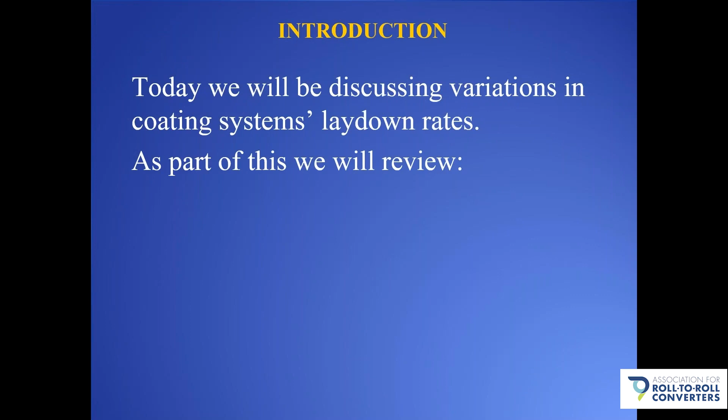So today we'll discuss variations in coating systems laydown rates. As part of this, we'll review the possible causes for these variations and what actions can be taken to address them.

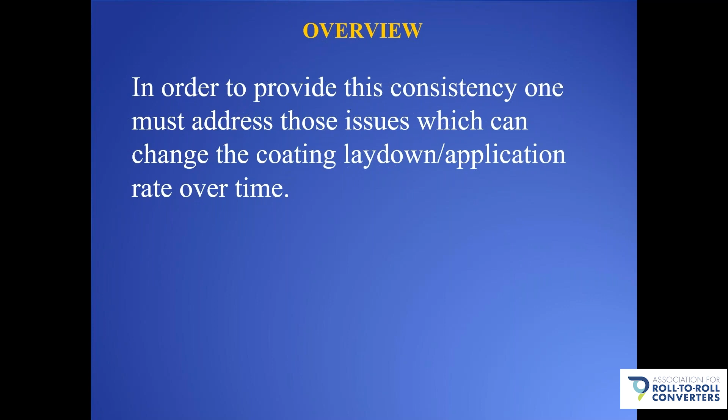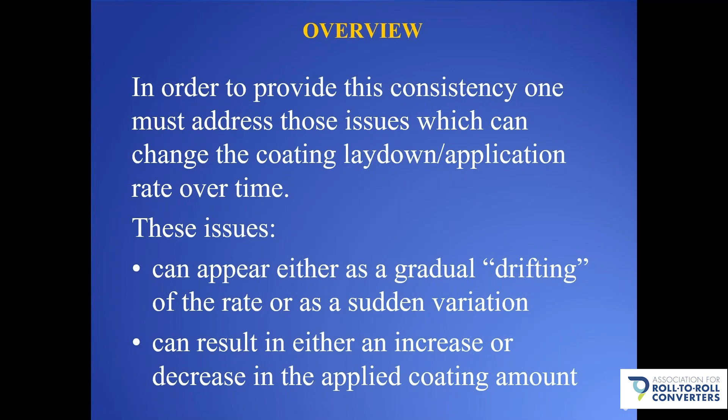So the goal of every coating operation is to maintain a consistent laydown rate throughout a run, as well as when applying the same coating at a future date. In order to provide this consistency, one must address those issues which can change a coating laydown or application rate over time. Now, these issues can appear either as a gradual drifting of the rate or as a sudden variation, and can result in either an increase or decrease in the applied coating amount.

A wide variety of issues can cause these changes to occur. Many are specific to certain types of coatings and coaters, and some are what we'll call short-term, meaning they result in changes in the coating laid down within a single run, and some of them are long-term, occurring over extended usage or between product changes.

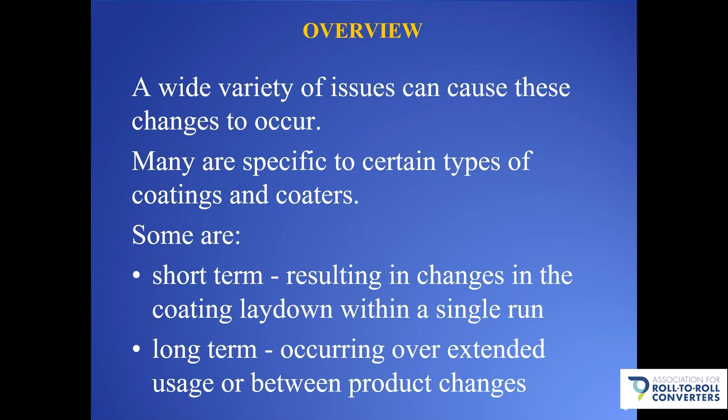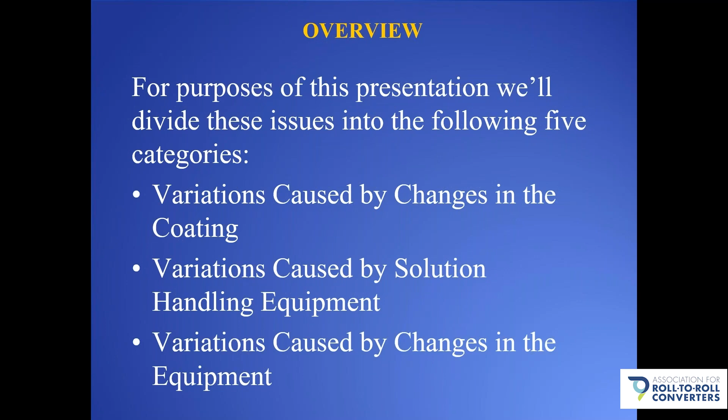So for purposes of this presentation, we'll divide these issues into the following 5 categories: variations caused by changes in the coating, variations caused by solution handling equipment, variations caused by changes in the equipment, and by equipment we mean the coater itself, variations caused by temperature changes, and lastly, variations caused by equipment usage and wear. I'll point out that some of the topics or examples we'll talk about today may fit into more than one of these categories, but for the purposes of this presentation, we put it into a particular category.

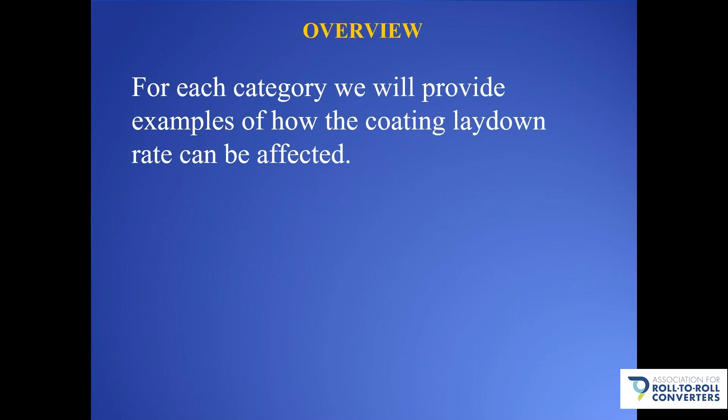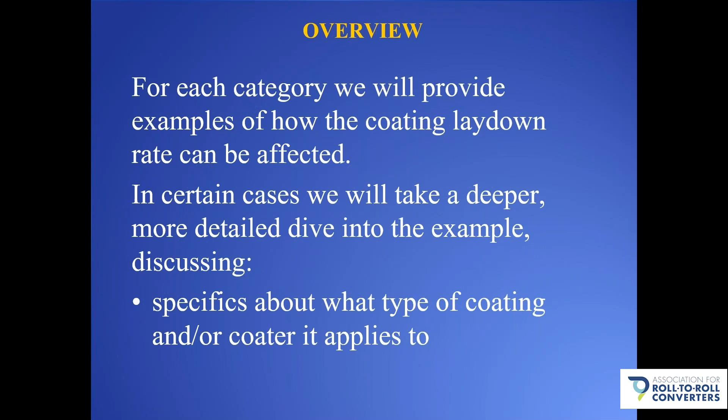So for each category, we'll provide examples of how the coating laydown rate can be affected. In certain cases, we'll take a deeper, more detailed dive into the example, and we'll discuss things such as specifics about what type of coating or coater it applies to, how it can affect the coating consistency, and what corrective actions can be taken.

So let's start with variations caused by changes in the coating. There's several changes that can occur in the properties of the coating that have an impact on the laydown rate, and these changes typically show themselves over the course of a run. So as we mentioned earlier, they typically tend to be short-term issues. They can occur in either water or solvent-based coatings, and they can be found in a wide variety of coaters.

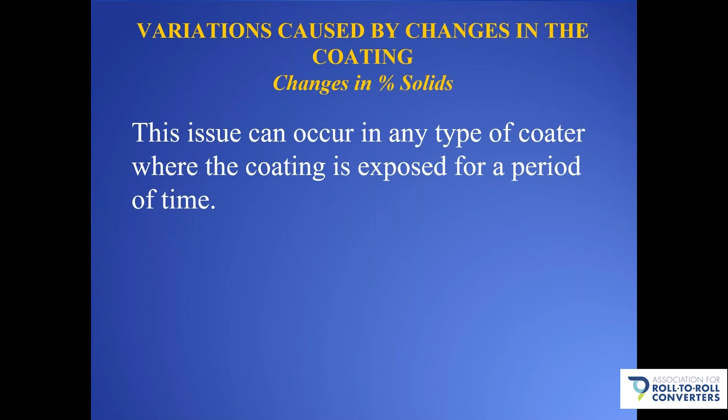So let's talk about a few examples of these issues, starting with changes in the percent solids. This issue can occur in any type of coater where the coating is exposed for a period of time. A typical example of this is a pan-fed offset gravure coater, like you see here, when using a solvent-based coating. So as the coating sits in the pan, the amount of solvent, many of which evaporate under room conditions, continuously reduces. This results in a continuous increase in the percent solids, which results in a continuous increase in the final coating laydown rate.

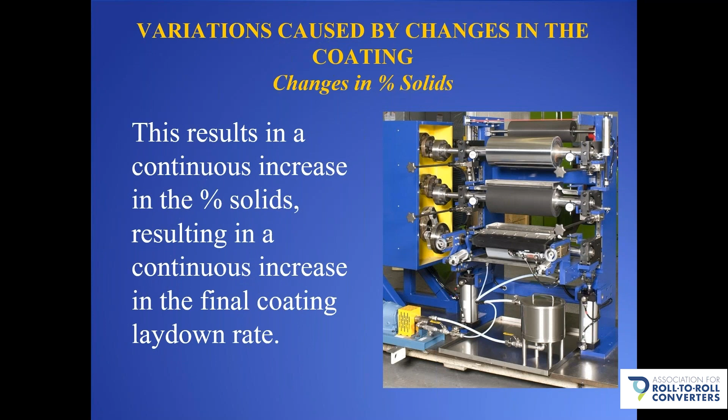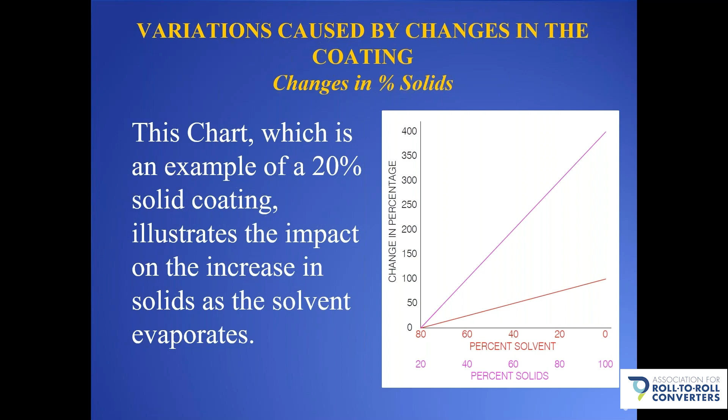So the chart on the right is an example of a 20% solid coating, and it illustrates the impact of the increase in solids as the solvent evaporates. As you see from the magenta line, that shows the change in percent solids as it goes from 20 to 100%, and you'll notice that the change in percent of solids grows rapidly.

Now, what can we do to address this issue? Well, a couple of things. First of all, the easiest way is to reduce the amount of coating that's held in the pan or pond, giving it less time to be exposed and therefore less time for solvent evaporation. Cover the pan or pond to reduce the evaporation or flashing. Or monitor the percent solvents and automatically adjust to correct for it. There's systems that you can use that automatically do this, sample the solvent, and then continuously replenish it.

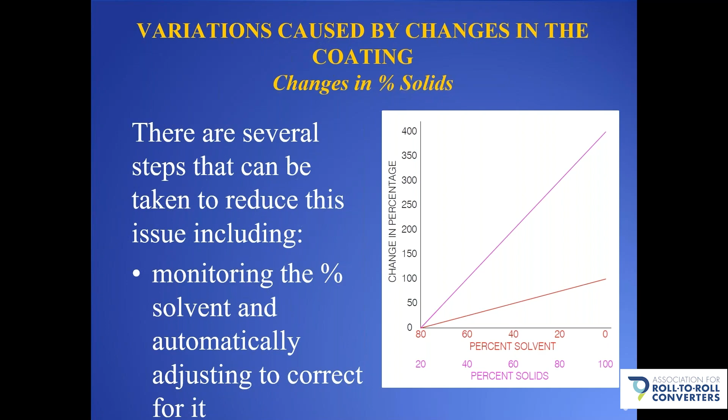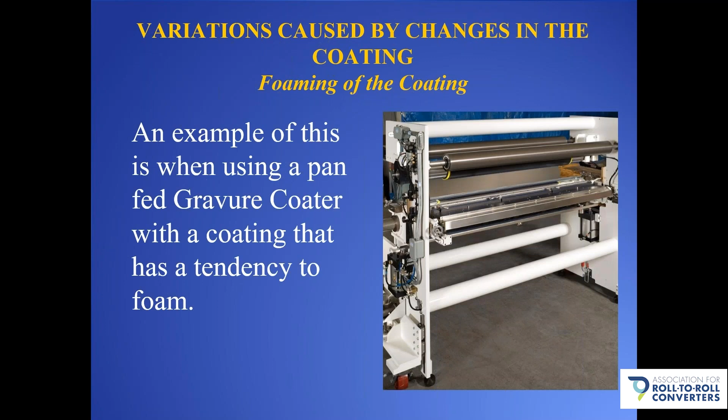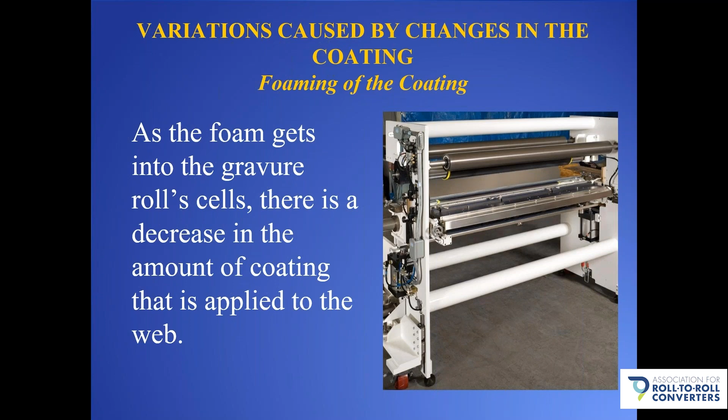So next, let's talk about foaming of the coating. An example of this is when using a pan-fed gravure coater where the coating has a tendency to foam. As the coating sits in the pan, the turning roll causes this foam to form. And as this foam forms, it gets into the gravure roll cells, which results in a decrease in the amount of coating which is applied to the web. Over time, as the amount of foam continues to increase, more foam gets into the cell, less coating therefore gets into the cells, and the coating laydown continues to decrease.

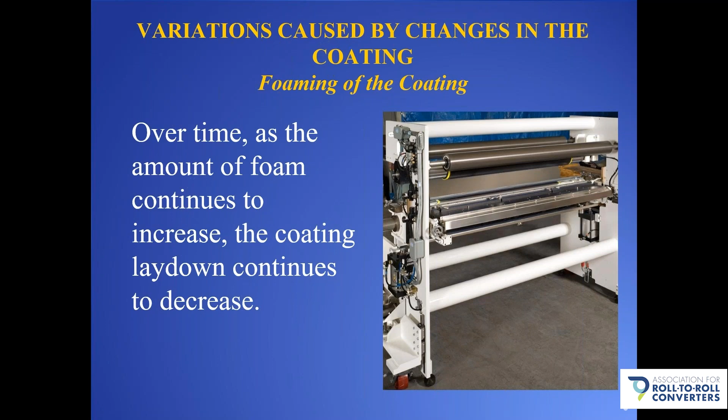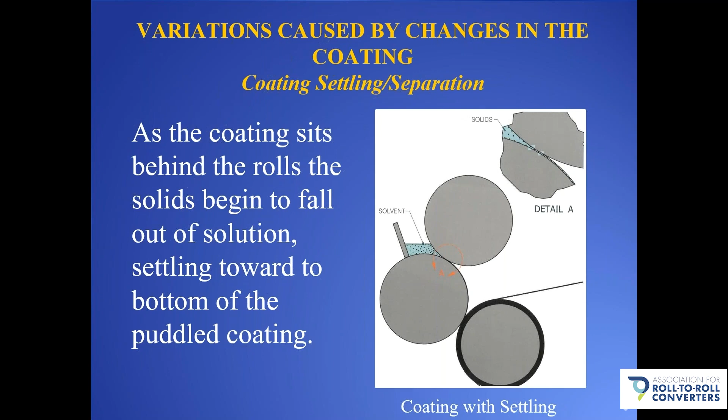Next, let's talk about coating settling and separation. This issue occurs when the solids in the coating begin to settle or separate from the solution that's holding them. As an example, let's look at a nip-fed reverse roll coater. As the coating sits behind the rolls, the solids begin to fall out of solution, settling toward the bottom of the puddled coating. In this sketch, you see at the beginning a fairly even or uniform distribution of the solids, and in time, the solids begin to migrate toward the bottom of the puddle or pond.

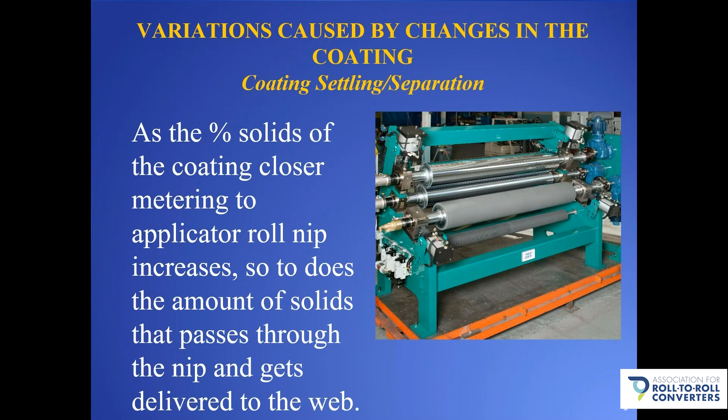So as the percent solids of the coating closer to the metering to applicator roll nip increases, so too does the amount of solids that actually passes through the nip and gets delivered to the web. So how do we address this issue? Well, again, much like we talked about earlier, you can reduce the amount of coating in the puddle, which reduces the time that the coating has to separate. Or you can provide mixing hardware in the puddle, which continuously keeps the solids in solution or in suspension.

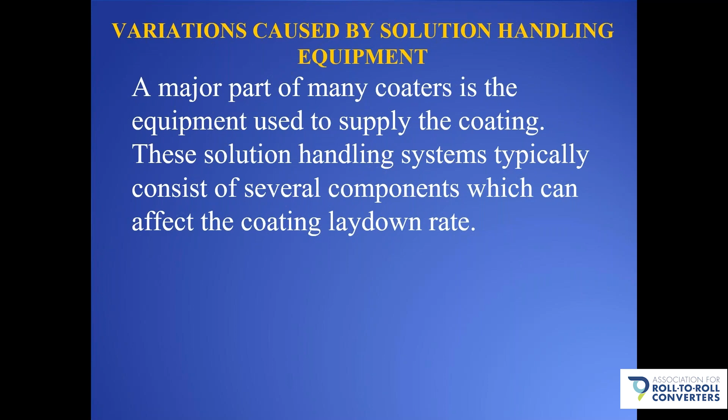So now let's move on to variations caused by solution handling equipment. A major part of many coaters is the equipment used to supply the coating to the coater, and these solution handling systems typically consist of several components which can affect the coating laydown rate. Let's talk about a few examples of this.

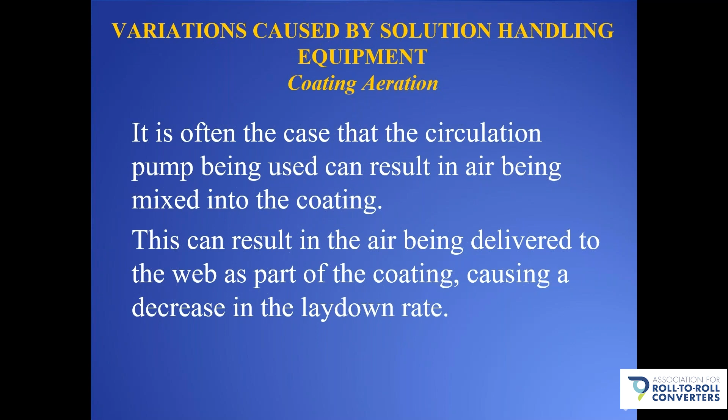Let's start with coating aeration. It's often the case that the circulation pump being used can result in air being mixed into the coating, and this can result in the air being delivered to the web as part of the coating, which would obviously cause a decrease in the laydown rate.

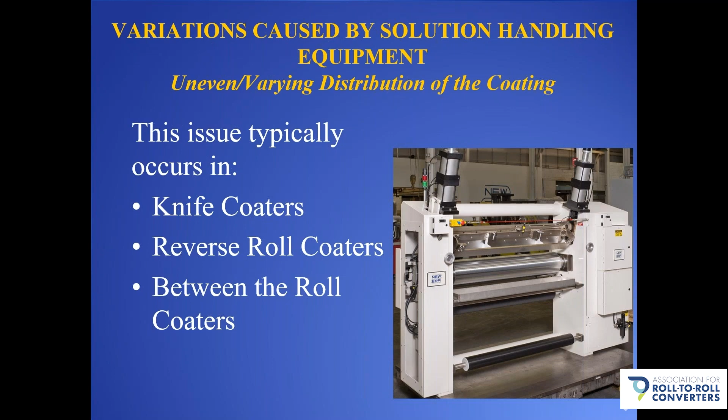Another issue is uneven or varying distribution of the coating. For coaters where a pond or puddle of coating is used to supply the coater, an uneven or varying distribution of the coating to that pond or puddle can result in a variation in the coating laydown rate. This issue typically occurs in coaters such as knife coaters like you see here on the right, reverse roll coaters, and between the roll coaters. Now this issue really shows itself when you get into higher viscosity coatings where the coating itself doesn't have a tendency maybe to flow out and give a uniform distribution within the pond or puddle.

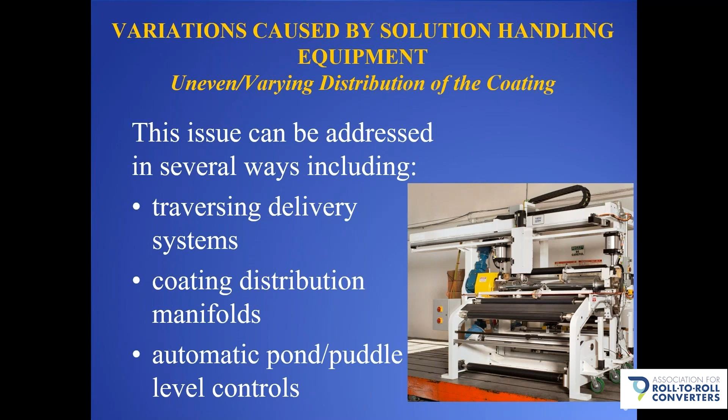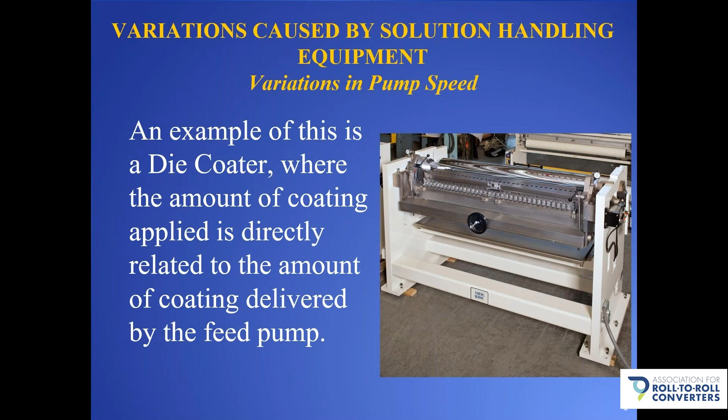So next, let's talk about variations in pump speed. There's several coating systems where the laydown rate is directly affected by variations in the solution handling system's pump speed. An example of this is a die coater like you see here on the right, where the amount of coating applied is directly related to the amount of coating delivered by the feed pump. There's several factors that can cause changes in the pump speed, including changes in the load on the pump due to factors such as changes in your coating viscosity, or drift in the pump motor's speed control.

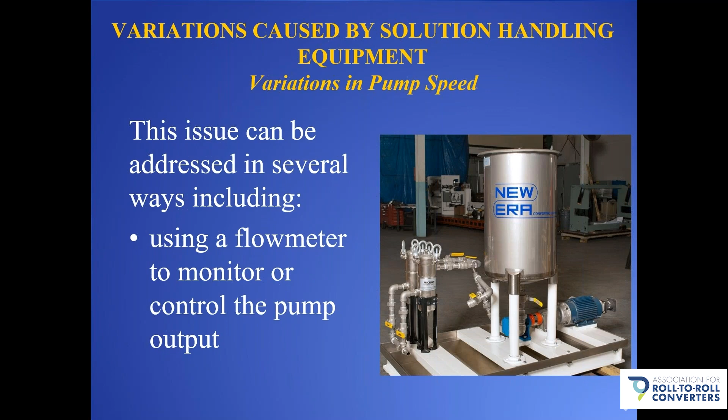So how do we address these issues? Well, we can use a flow meter to monitor or control the pump's output. Or, as you see here, we can use a coating measurement system, a thickness gauge that will measure the coating laydown and automatically adjust the pump speed to compensate for these variations.

Another issue is filter plugging. For certain coating applications, variations in the coating laydown can be a result of the solution delivery system's filters becoming plugged. This can cause a drop in the flow rate to the coater, which will obviously result in a drop in the laydown rate.

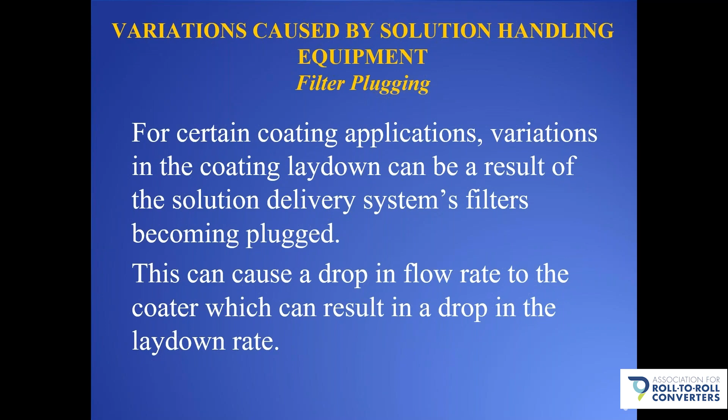So how do we address this issue? Well, we can put a flow meter on the exit side of the filter to monitor the delivery rate and even use that to control the pump. Or we can use differential pressure switches across the filter, where these switches tend to sense the increase in pressure associated with the plugging of the filter and therefore notify you that there is indeed an issue with the filter plugging.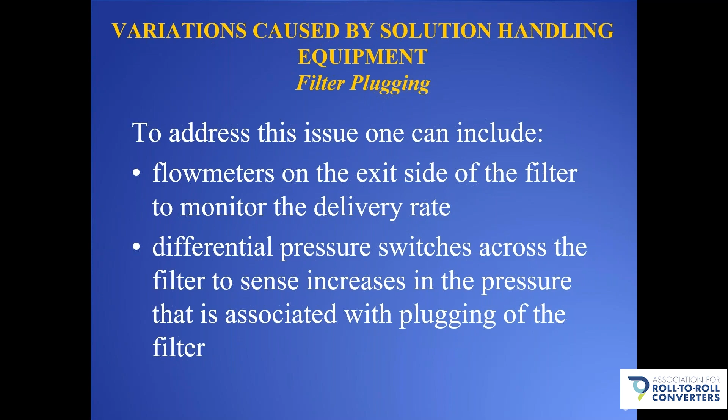Next, let's move on to variations caused by changes in the equipment, meaning the coater itself. It's often the case that issues with the coating equipment can result in variations in the coating application rate. These issues can arise from a wide variety of mechanical and electrical items, can affect virtually every type of coater, and can affect every form of coating. Of particular concern are those items used to adjust and set the coater's operating parameters, where any unwanted variations in these devices during operation typically result in an unwanted change in the laydown rate.

So let's talk about a few examples, starting with changes due to variation in force.

Certain types of coaters can be affected by forces generated by the coating being applied. An example of this is a between the roll coater, like you see here, where the coating can impart a separating force as it passes between the rolls. Any changes in the coating or the coater's operation over the course of the run can result in a change in these forces, and this change in force will lead to a change in the deflection of the rolls, which will result in a change in the laydown rate.

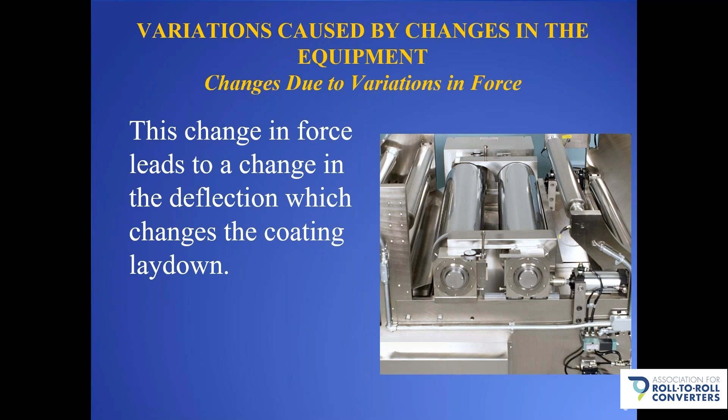So how does one address this issue? Well, first of all, assure that the coating being supplied remains consistent. Assure that the coater's operating parameters remain consistent throughout the run. And lastly, you can get very complicated, and as shown here, use deflection compensation via roll bending that's integrated with an automatic measuring system, which automatically adjusts for any deflection or changes in the roll deflection.

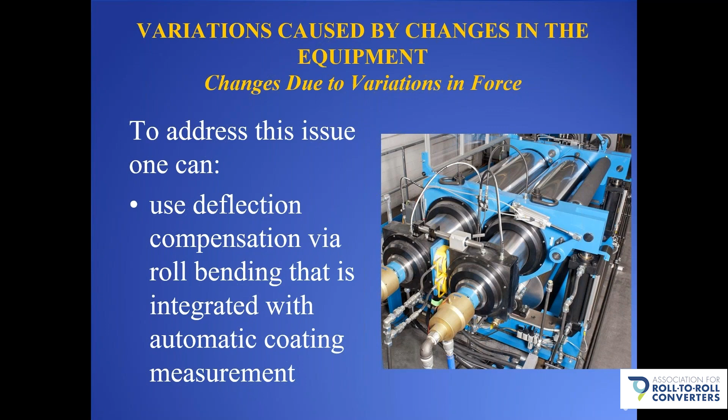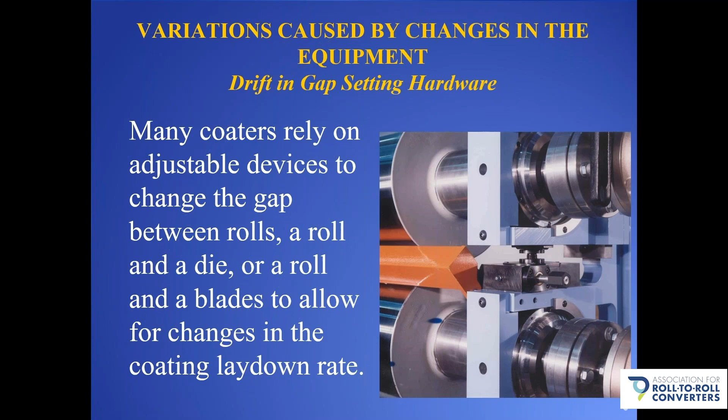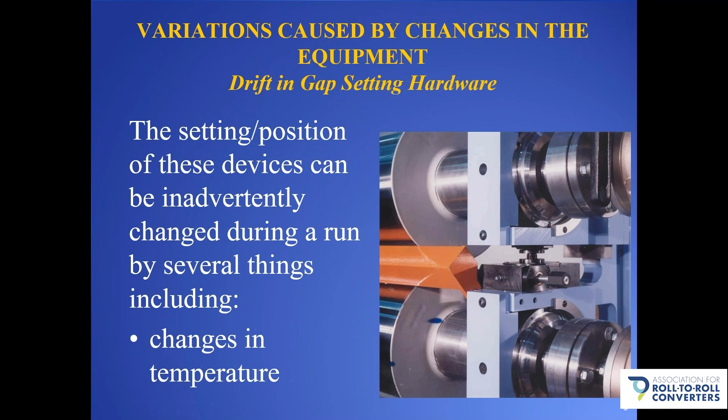Another issue is drift in gap setting hardware. Many coaters rely on adjustable devices to change the gap between rolls, or a roll and a die, or a roll and a blade, to allow for changes in the coating laydown rate. The setting or position of these devices can be inadvertently changed during a run by several things, including vibrations, debris, operator's unintentional contact, or changes in temperature. These occurrences can result in a change in the final coating laydown rate.

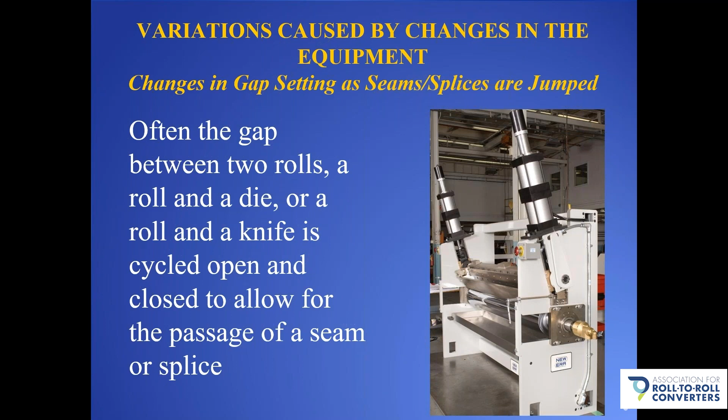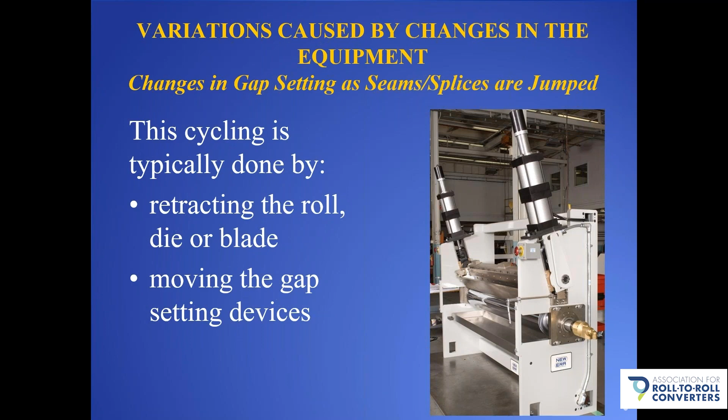Another issue is changes in gap setting as you jump a seam or a splice. Often the gap between two rolls, or a roll and a die, or a roll and a knife, is cycled open and closed to allow for a seam or a splice to pass. This cycling is typically done one of two ways: either by retracting the roll, die, or blade, or by opening the gap setting device and then closing it again after the seam or splice passes. What becomes important is that the design assures the gap is reestablished precisely after the cycling is completed. If it's not reestablished correctly, you're going to have a change in your gap and therefore potentially a change in the coating laydown rate.

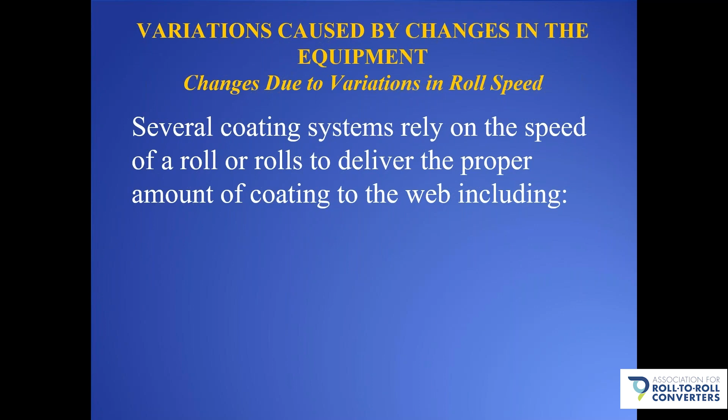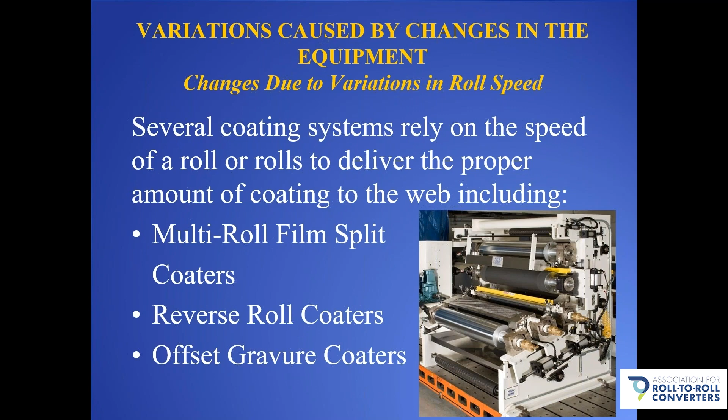Another issue is changes due to variation in roll speed. Several coating systems rely on the speed of a roll or rolls to deliver the proper amount of coating to the web, including multi-roll film split coaters like shown, reverse roll coaters, offset gravure coaters, and kiss coaters. There are several factors that can cause variations in the speed of the roll, including, similar to what we talked about for pumps, a change in the load on the roll due to factors such as changes in viscosity or changes in gap setting, or a drift in the roll's motor speed control. In these cases, a change in the roll speed will change the coating laydown rate.

So now let's move on to variations caused by temperature changes. There's many ways that changes in temperature can result in changes in the coating laydown rate. This affects a wide variety of coaters and can impact the laydown rate of solvent-based coatings, water-based coatings, and 100% solid coatings. Of particular note, we should think about hot melt coatings where temperature is part of the equation of delivering those hot melts, and therefore any changes in temperature can change the coating laydown rate.

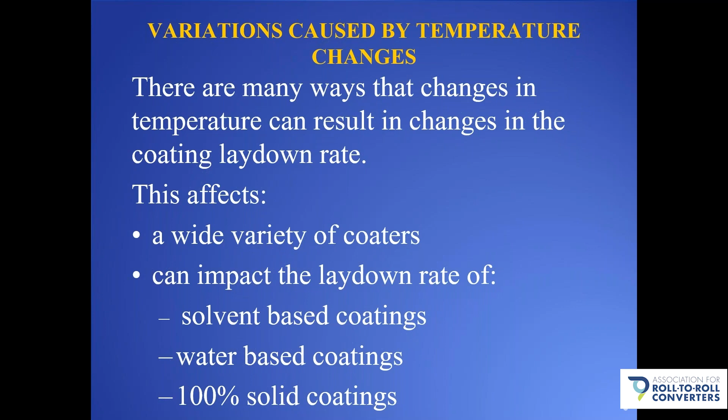So what are a few examples of this? Let's start with changes in gap as the temperature changes. As an example, let's consider a nip-fed reverse roll coater, and let's assume we're operating in the winter.

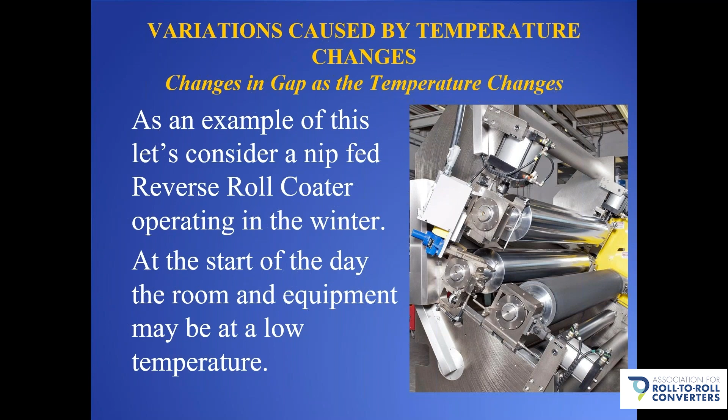At the start of the day, the room and the equipment may be at a low temperature. As the day goes on and as you continue your operation, the temperature may increase from several factors, including heat given off by the drying equipment or friction as the rolls operate. So let's look at a typical example of this.

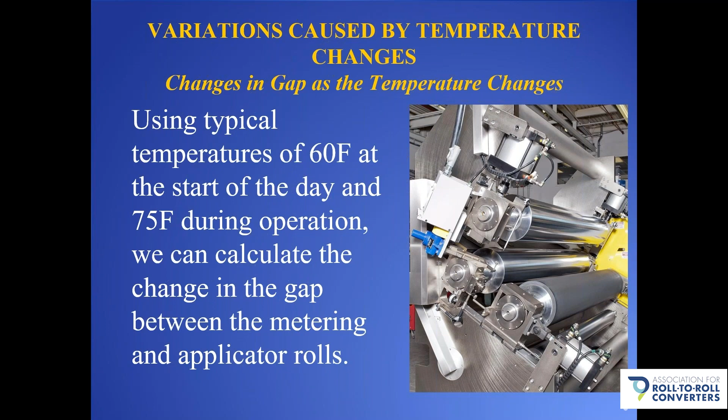Let's assume at the start of the day it's 60 degrees in your room, and over the course of your operation, that temperature increases to 75 degrees. We can actually calculate the change in gap between the metering and applicator rolls and look at how that affects things. So I'm going to throw a little math in.

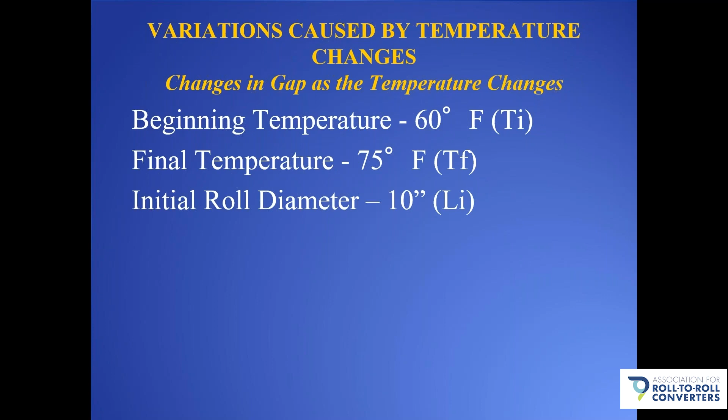We have a beginning temperature, as we talked about, of 60 degrees F, so this will be our TI, or T initial, and a final temperature TF of 75 degrees Fahrenheit. Let's assume an initial roll diameter of 10 inches, and we're assuming they're steel rolls, so we know there's the thermal expansion coefficient shown here. If we take those numbers and plug them into the formula, change in length equals the initial length times the coefficient of expansion times the change in temperature, you come out with a 0.001 inch, or 1 mil, change in the diameter of the rolls.

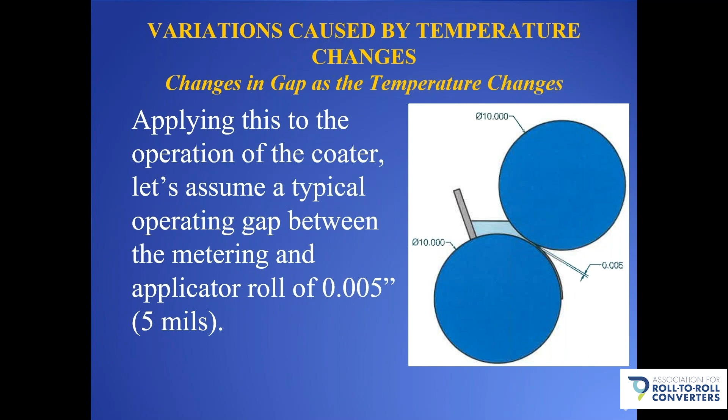So let's look at how that affects things. Let's assume at the start of the day we set our gap at 5 mils, which is very typical for a reverse roll coater. As the temperature changes, the roll diameters change by 1 mil, so the radius changes by a half mil. The two rolls' radii grow toward each other by a half mil each, resulting in the gap changing from 5 mils to 4 mils.

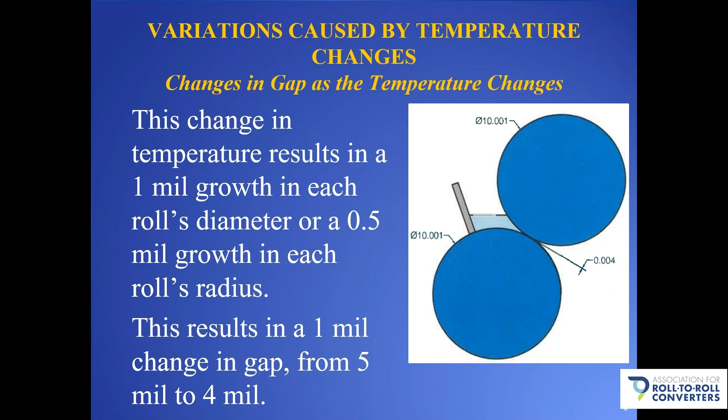So this 15-degree change in temperature equates to a 20% decrease in the gap, from 5 mils to 4 mils, and therefore a 20% decrease in the amount of coating delivered to the applicator roll, and an associated change in the amount of coating being delivered to the web.

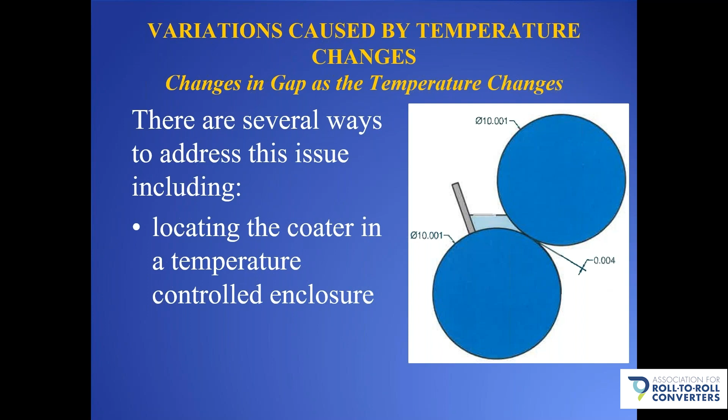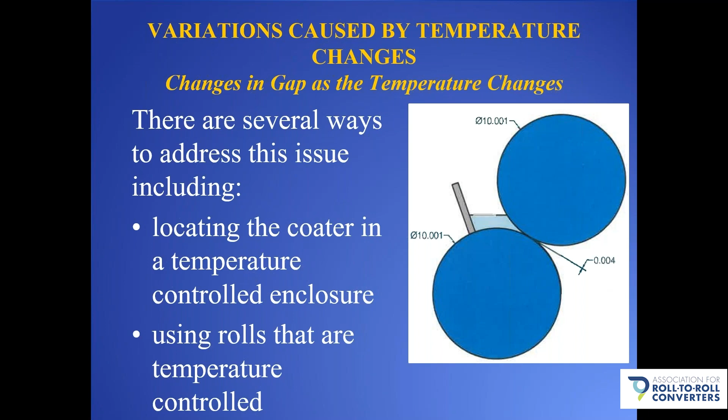So there's several ways to address this particular issue, including locating the coater in a temperature-controlled enclosure so that during the course of the run, the temperature of the coater stays consistent. Using rolls that are temperature-controlled makes it very easy to keep those rolls at the same temperature regardless of the environmental conditions. Or using a closed-loop feedback device, such as a thickness gauge, that automatically compensates for these changes to maintain a consistent laydown rate throughout the run.

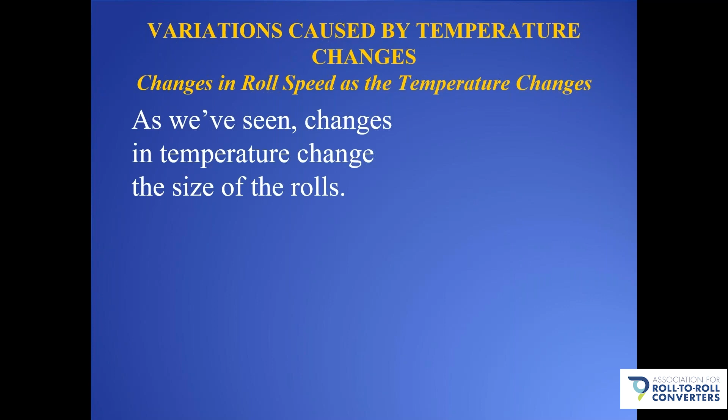Another temperature-related issue is changes in roll speed as the temperature changes. As we've seen from the previous example, changes in temperature change the size of the rolls. So for a system such as a KISS coater, as shown, a speed-driven roll is used to transfer the coating to the web. As the roll size changes, so does the roll surface speed, and this change in speed results in a change in the coating laydown rate.

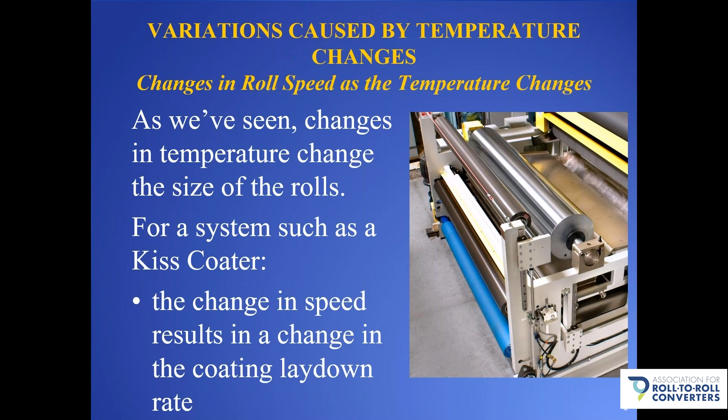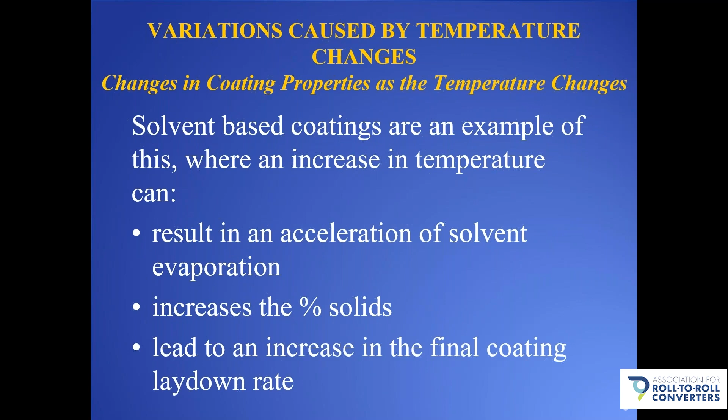Another issue that arises from temperature changes is changes in the coating properties. This is one of those where we could have talked about it when we discussed changes in coating, but we decided to put it in changes regarding temperature. So let's talk about a solvent-based coating, where an increase in temperature can result in an acceleration of solvent evaporation, which will result in an increase in the percent solids, which will lead to an increase in the final coating laydown rate.

Now let's move to the last of our 5 areas, and let's talk about variations caused by equipment usage and wear. There's several factors associated with the usage and wear of equipment that can result in a change in the coating laydown rate. These issues can affect every type of coater, can affect every type of coating, can be both short-term and long-term, and typically result in a gradual change in the coating laydown rate.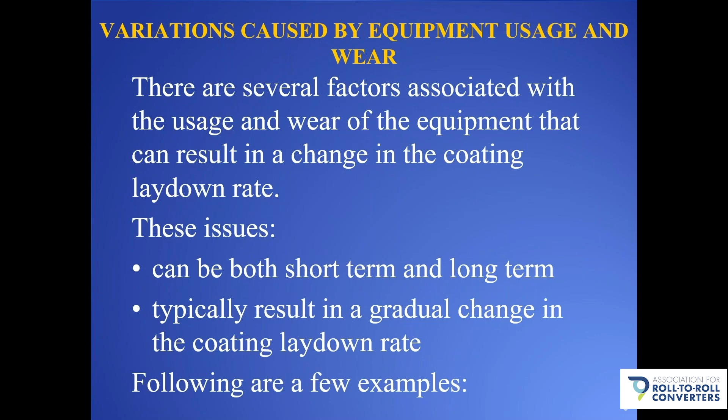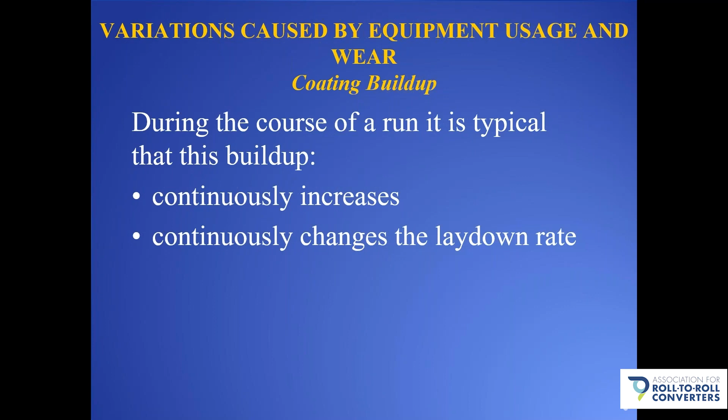So let's talk about a few examples of this. Let's start with coating buildup. The buildup of coating on the coater parts during operation is a common issue that can affect many different types of coaters and can occur with many different coatings. During the course of a run, it's typical that this buildup continuously increases and continuously changes the laydown rate. Now, fortunately, most issues related with coating buildup can be addressed through proper coater operation and good housekeeping.

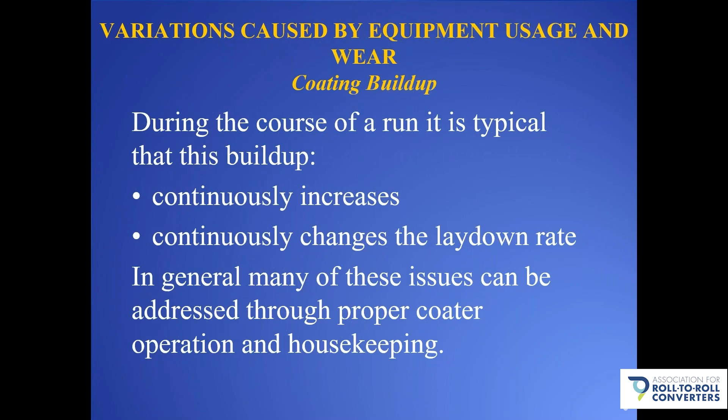Now, a specific example of this is buildup of dried coating in the cells of a gravure roll over the course of a run. This can be caused by several factors, including improper release of coating from the cells, poor doctoring of the roll,

solvent flashing, and stops of the operation during which the coating dries in the roll. Now, all of these factors can be addressed through proper setup and operation of the coater, including proper setup of the coating nip gap, footprint, and pressure to make sure you get good release of the coating from the cells, assuring that the doctor blades are correctly set and maintained, maintaining delivery of a consistent coating solution to the coater, and continuously re-wetting the roll on stops in operation so that the coating doesn't dry in the cells.

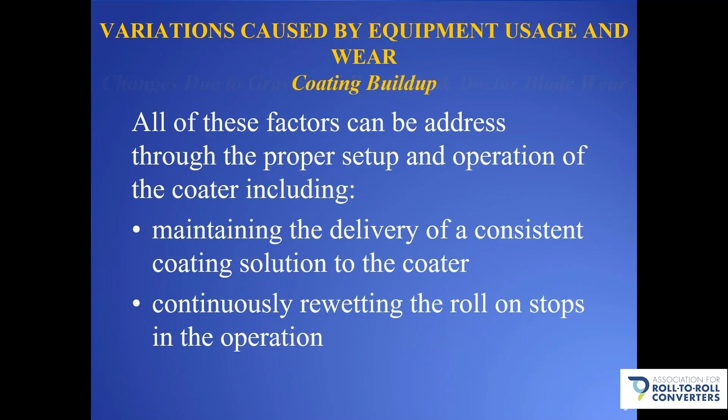Another issue that comes up is changes due to gravure cell pattern and doctor blade wear. Over the course of time, as a result of the forces that occur from roll doctoring, the cell pattern in the gravure roll wears, and the doctor blades wear. This wear results in a gradual change in the coating laydown rate.

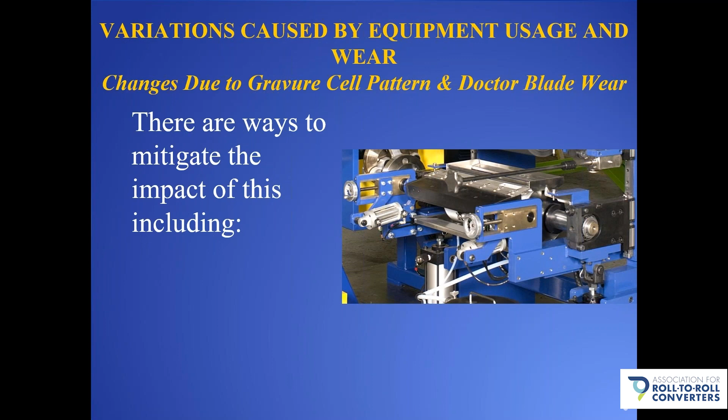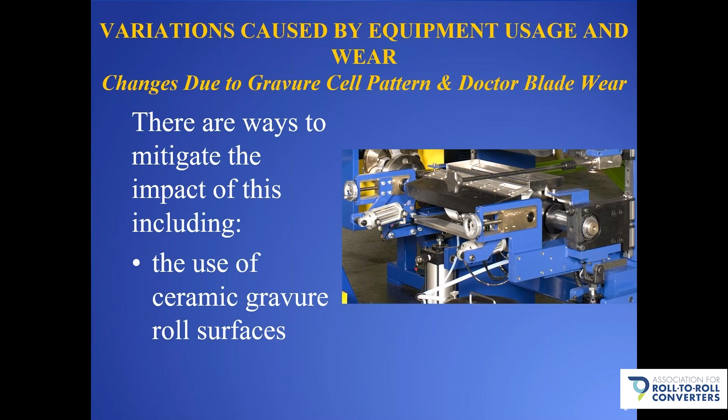So how do we address this? What can we do to mitigate the impact of this? Well, it's a couple of things. You can use ceramic gravure roll surfaces. Though they're more costly, because of their hardness, they obviously don't wear as fast, so therefore you get a better and more consistent coating over a longer life. The other thing you can do is use a dynamic loading system on your blade that compensates for the wear in that blade so that you get a uniform, even, and consistent wipe of the rolls.

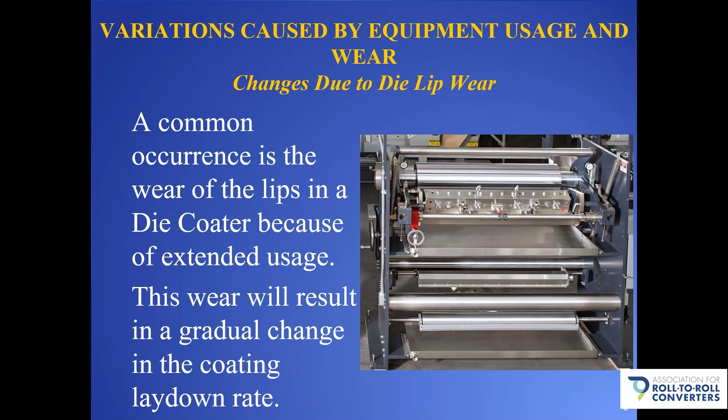Next, let's talk about changes due to die lip wear. A common occurrence is the wear of the lips in a die as you use it over time, and this wear will result in a gradual change in the coating laydown rate. So how do we address this issue? Well, one of the things you can do is regularly inspect and adjust the die lips, or even replace them as needed. Or again, you can use a closed loop coating measurement system that compensates for this wear, automatically adjusting, in this case, the pump speed to deliver the proper amount of coating.

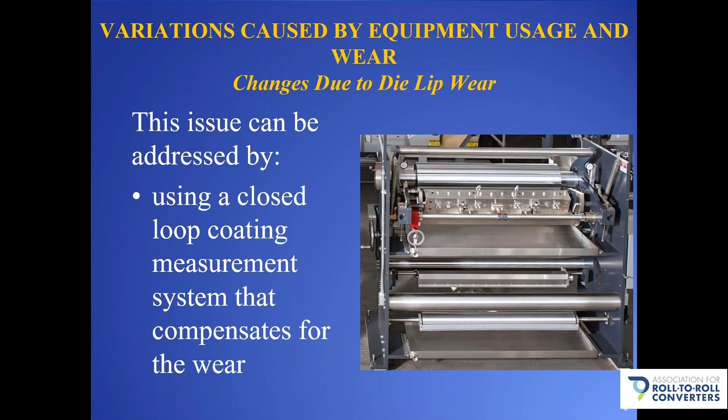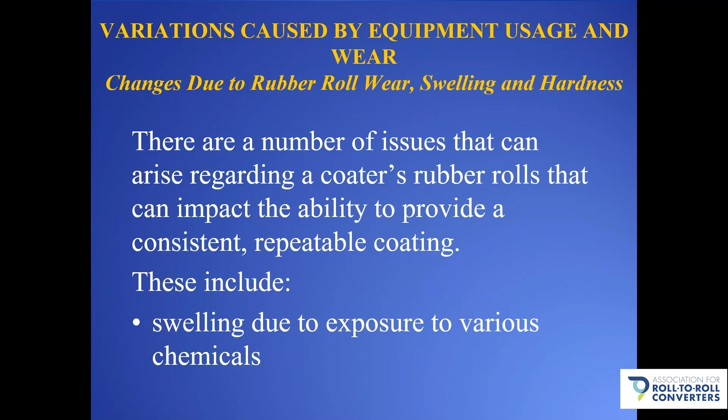So the last thing I'm going to touch upon is changes due to rubber roll wear, swelling, and hardness. There's a number of issues that can arise regarding the coater's rubber rolls that can impact the ability to provide a consistent, repeatable coating. These include wear due to usage, swelling of the rubber due to exposure to various chemicals, and that's not just during operation, but often also due to cleaning of the rolls, and changes in the hardness of the rubber.

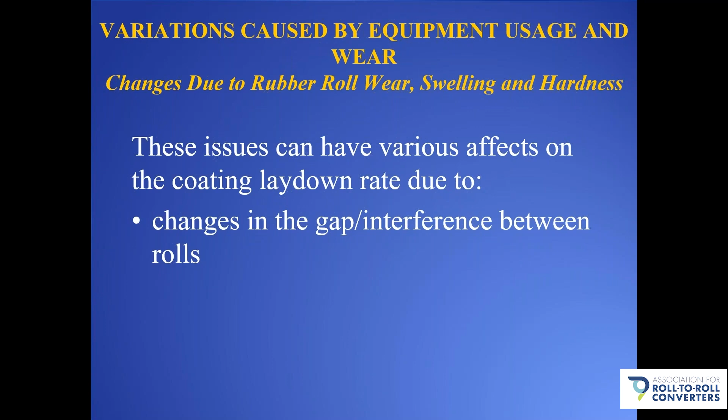Now, these issues can have various effects on the coating laydown rate due to changes in the gap or interference between rolls, which can affect how the coating is transferred from roll to roll or roll to web. Changes in the footprint of the nip, which again can affect transfer from roll to roll, or in the case of gravure, the inability to properly remove the coating from the cells, or changes in the surface speed of the roll, which again can impact the transfer of coating and the proper laydown rate.

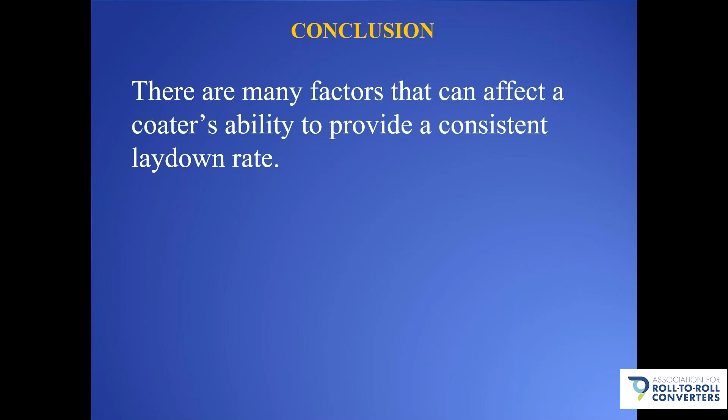So in conclusion, there's many factors that can affect the coater's ability to provide a consistent laydown rate. What really becomes important is to evaluate the coater's operation to determine what factors may be affecting it, and then develop a plan to address those factors.